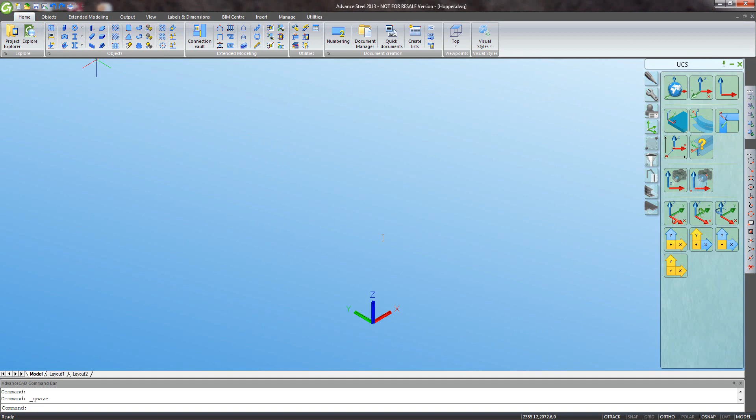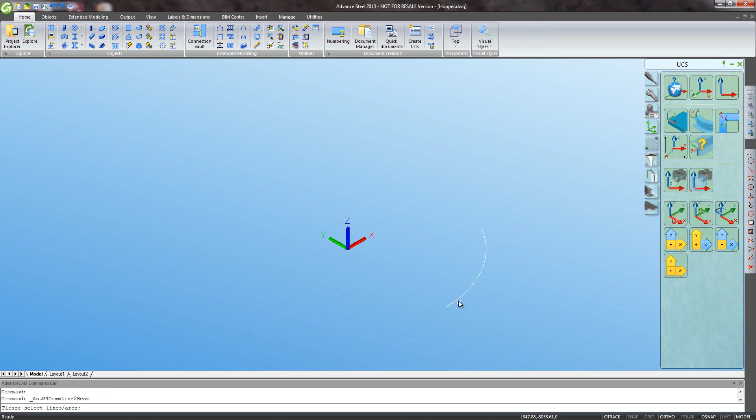So let's start a blank file, and I'm going to start off by doing some simple construction work. So I need an arc to start with. Just put in some simple dimensions, and I can convert that arc into my curved beam. It's going to support the hopper. I'll have a bit of channel, so that seems to have come up with the correct size for me.

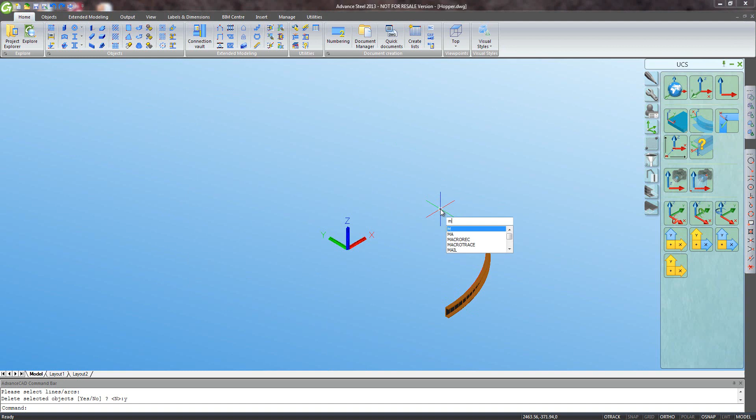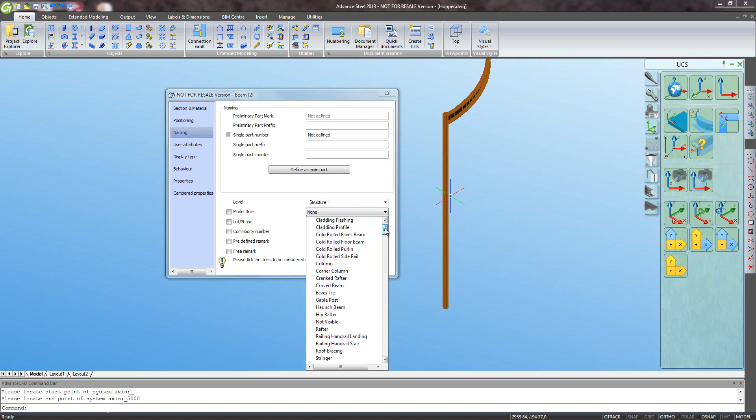Get it in the right position and tell it what part it is. Now I'll move that up to the right height instead of ground level, and I'm going to draw one of my columns on the end of that. Again, it seems to have come up with a suitable size for me. I'll tell it that's a column. And I'll adjust the position of that a little bit.

Now I don't actually want the column right on the join between the portions of circular ring, so I'm going to rotate the ring 10 degrees like that.

Now we need a nice connection between those members. So come to our connection vault, and from the categories we choose the desired joint type and select the members it applies to, and you can see immediately it's put on the plates and bolts and so on, but they're not quite what we want. I could have had it remember a standard configuration, but this isn't a very standard scenario, so I'll set up all the options I need individually here.

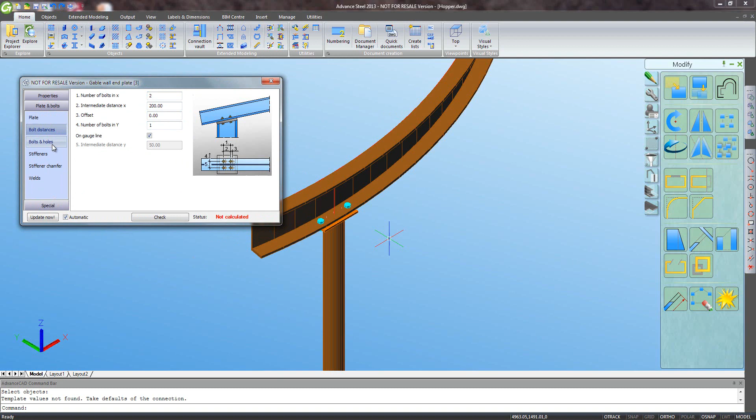Let's adjust those bolt spacings. I think I could do with a stiffener in there as well. A bit thicker than that, that's better. Okay.

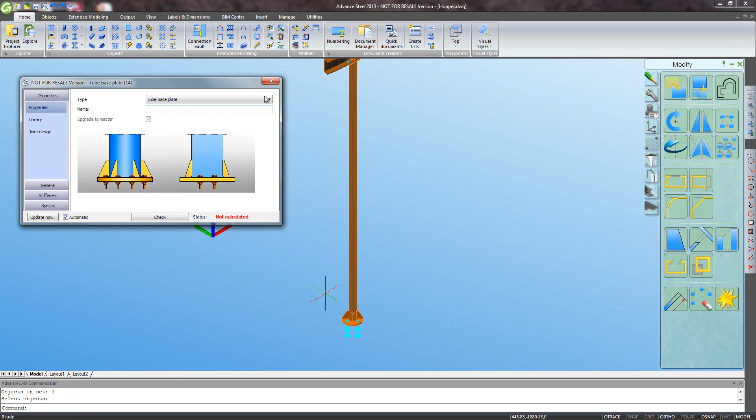I also need a base plate, so I'll go back to the connection vault, select a base plate for a tube, and this time that's put on a standard configuration, which looks perfectly good to me, so I'll stick with that.

So now I'll copy that column, check the options here, rotate it around 30 degrees so that I have 2 legs per ring portion. And as I do that copy, you can see here that the joint at the top and the bottom goes with it.

That's great. Let's have a think about doing a portion of our hopper now then. So I'm going to do some more construction lines. I'm going to go to a separate layer so I can see them clearly. And I'm going to do a couple of arcs again. So that's the arc for the bottom. Now the top arc,

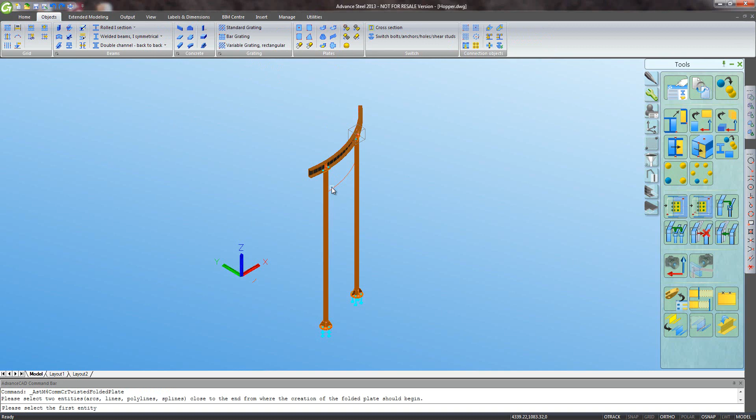I'm going to move that up to make the right height of the hopper. I'll keep them offset to the main structure so I can see them more clearly, but I'll go back to the normal layer and create my plate between the 2 arcs now. So in run command, settings here, there you go, I've got my portion of folded plate out of 3 panels. That's smooth enough for me.

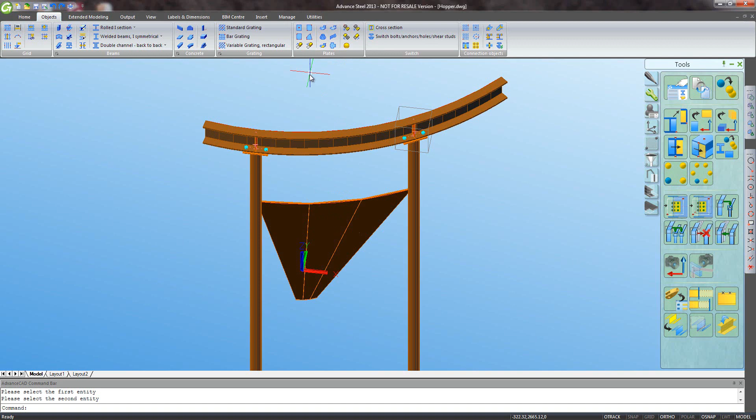And now I want to put a flange on top of that fold. So let's get it up in the right height. And now I'll move my coordinates. Let's move the plate round first so it's in the end of the beam. 10 degrees, that should do it. Yep. Now I'll put my flange on top of that.

I'll get my coordinates in the right place to tell it where I want the flange to go. And put my plate on the middle of that segment and offset it. Yeah, that's nice.

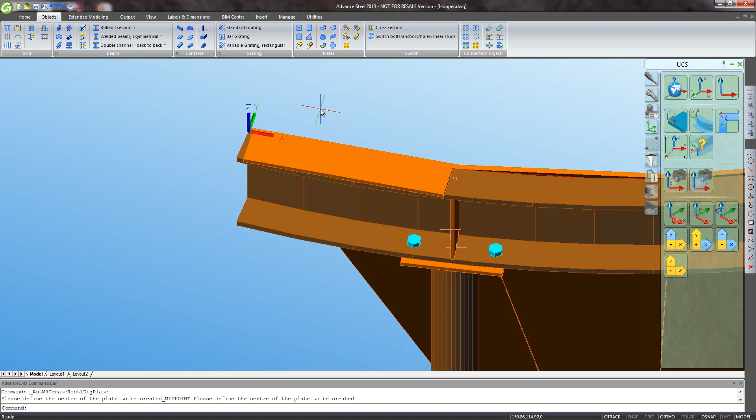Need to bolt those 2 together, so I simply ask for some bolts between this plate and this beam, tell it where to put them, and check the parameters. So it's come up with 3 long, 150 gap. Looks perfectly good to me, so I'll stick with that. That's great.

Okay, now I need to have 3 of those, so I can do a pattern of that plate. And if I, hang on, better put the coordinates back to 0 so I know where the centre of the vessel is. Now I'll do my pattern between those plates. 3 of those at 10-degree intervals.

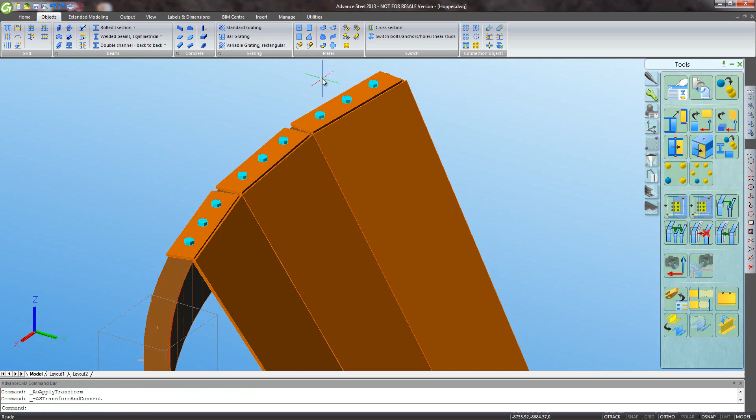There you go. Now those flange plates aren't going to hold the hopper up unless I actually join them to it, so I use a fold, create a fold between this member and this member, and there you go, let's put the fold in the middle. And repeat that for the other 2. Fold there, and a fold for those.

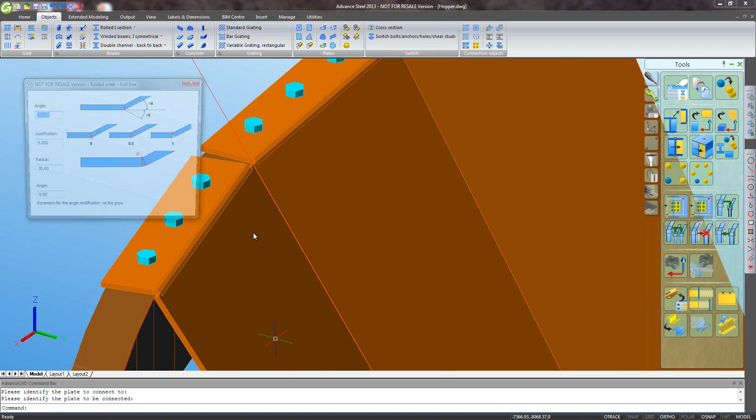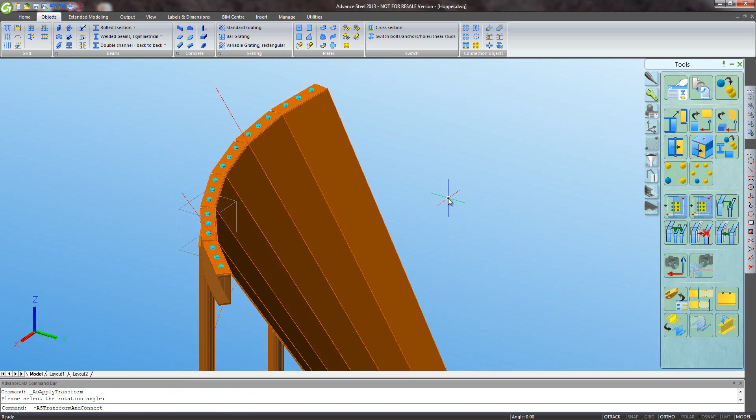Smashing. So now I've got one complete panel of my hopper. Now on this 60-degree bit of ring I've got 2 panels, so better go for another pattern or a rotate copy. And I'll have 2 of those like so. Yep, that's good. So that's 1/6 of my ring. It's looking good.

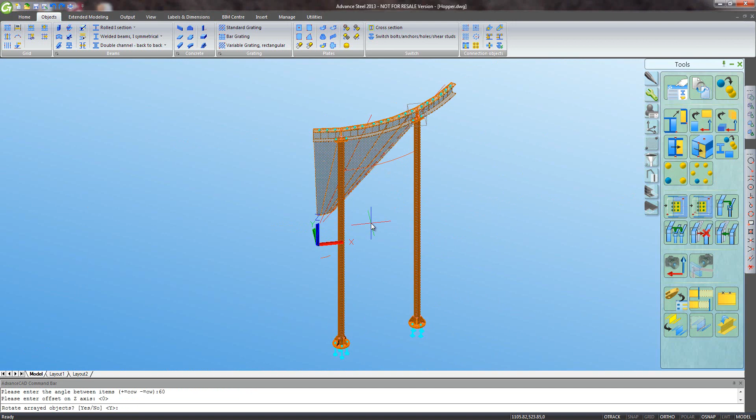Now I can very quickly, with just a rectangular or a polar array, copy these members, and I'll have 6 lots, 60-degree intervals. Bingo, there you go. There's my whole hopper.

So that's really easy, and already we're well along in our structure. Turn off the construction, I don't need that anymore.

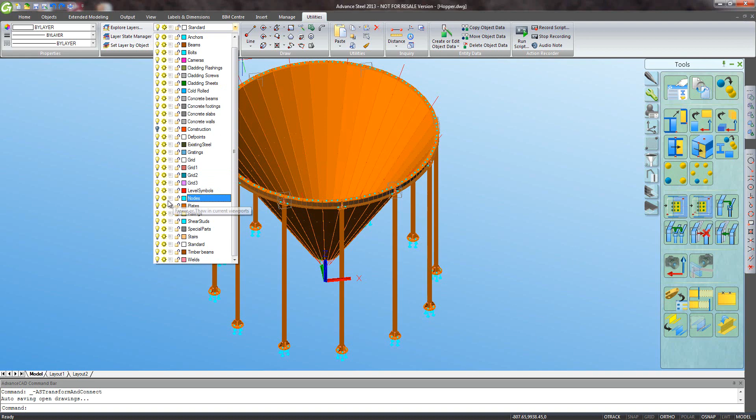So I want to connect these top rings up, so I think I'll hide the hopper for a minute, turn off that layer so I can see what I'm doing a bit clearer. Let's have a go at connection, so I could do with end-to-end connection. That should do it.

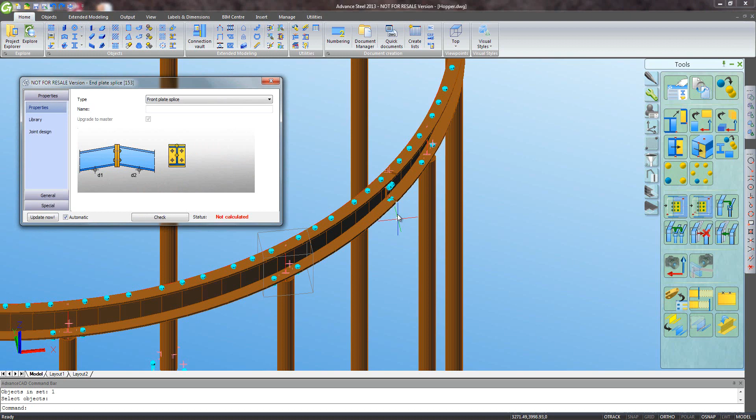Okay, those bolts look like they're in a slightly strange position. Let's check the options. The settings seem sensible.

Let's turn the plates on so I get the full picture again, and make sure I can see what's happening. Okay, the plates look alright. Let's edit that joint again and check the options once more.

So if the plates are alright, it must be something to do with the bolt spacing. Perhaps we just change this offset. Ah, that's better, that's good. Right, so now I've got the joint configured how I want it.

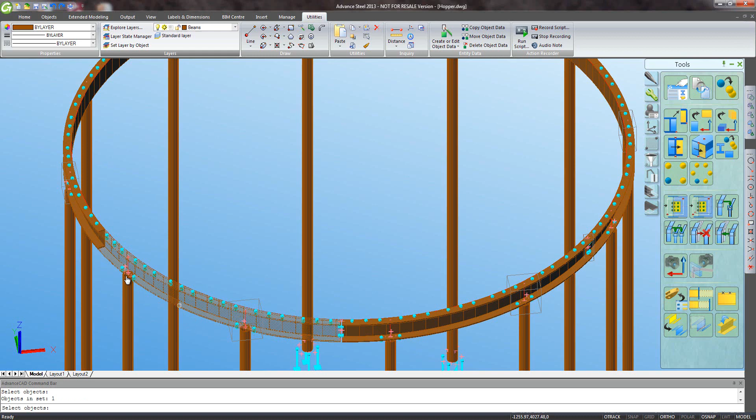Let's hide those plates so that I can see the beams more clearly. And I can copy that joint that I've got there to all the other connections between the ring beams. One there. And it's putting the same joint in, or the same configuration, in each of these 6 locations.

Okay, that's done that. Turn the hopper back on. Fabulous.

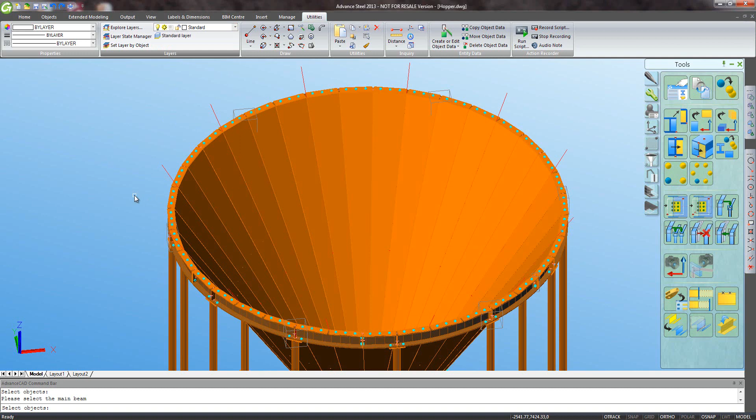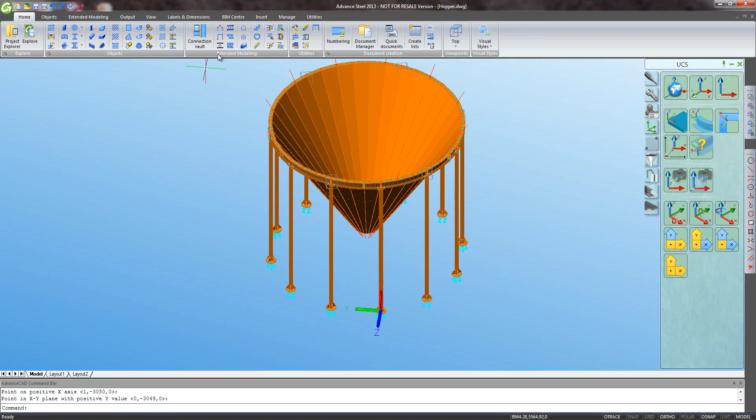So the last thing we've got to do now is put some bracing on. So let's put my coordinates back in the right place between the legs there, so I can put some bracing between the 2 legs. I'll ask for the bracing macro to create some, and I want to go between those 2 legs like that. Before I set any options, I'll use this white box and just adjust the top and bottom offset.

So I need to move the top down a bit, maybe 300mm, and the bottom up a bit so it's clear of the base plates.

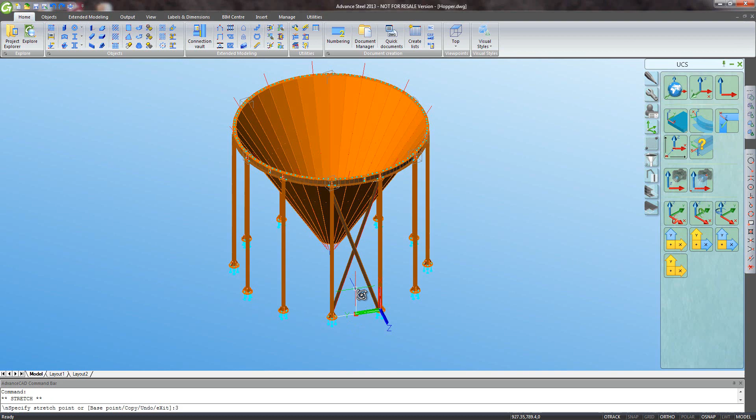Okay, let's have a look. Yep, that's good clearance there. Happy with that. So now I'll go back into the properties of the joint and set up all the beams how I want them.

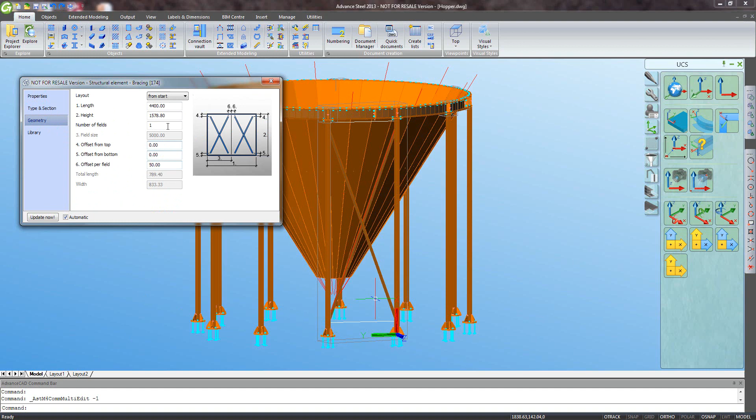First of all, I don't want a great big chunky channel, let's go for a smaller angle. Get them oriented nicely. Oh, don't forget the gap between the beams. And I want 2 X's, that's good. Okay.

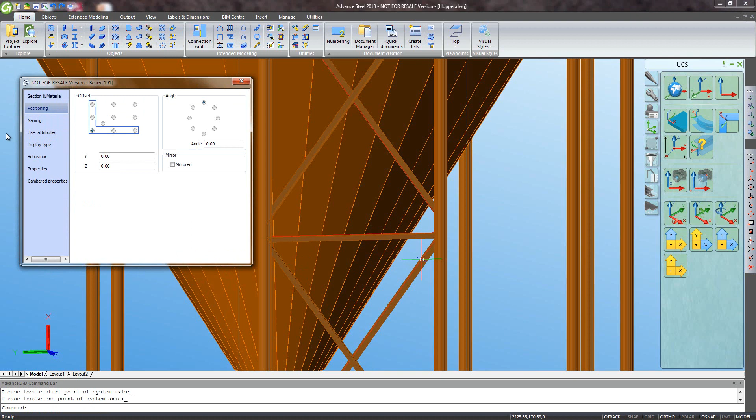I want a horizontal cross member, so I'll draw in a bit of angle directly from the end of that bit of bracing to this one. Choose the right size. It's on the heel. Don't forget to set the name.

Okay, now that's gone between the bits of angle, and remember there's a 50mm offset, so I just need to move the front edge there, and I actually want to move it up equally between the two panels of bracing, so that should be in the middle now.

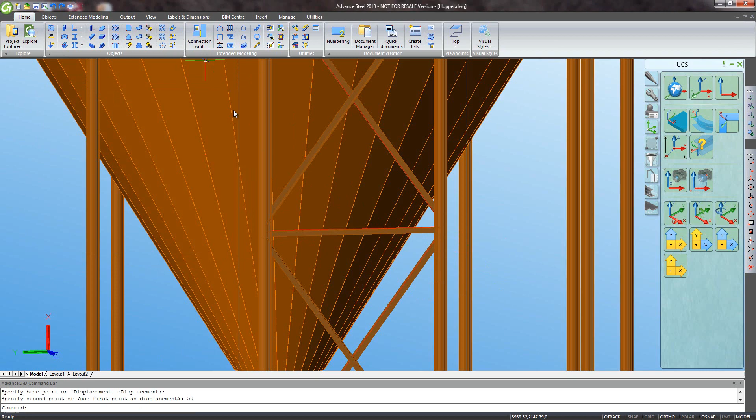And I'll create appropriate joints. So let's have a clear view of one corner. There you go. And I'll come into the connection vault once more under bracings. Let's go for a gusset plate. Simply choose the members. And there you go. It's not quite the shape I want, so let's have a look at the options.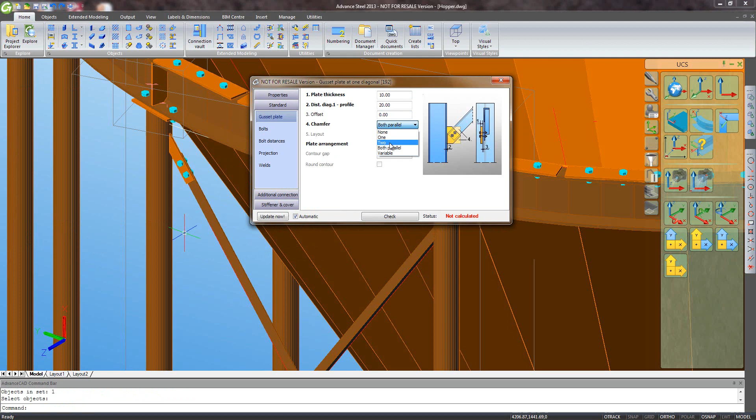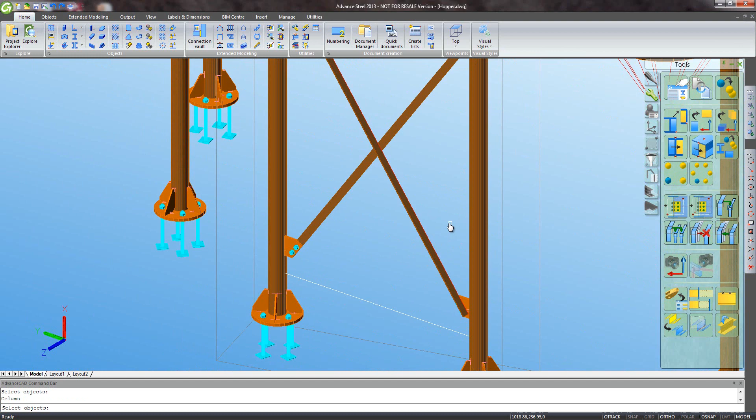That's better, happy with that. So I've got one I like. Now I can just do a copy again. I'll have another one of those joints between that column and that brace. These two, and these two. Great. Now it's the ones in the middle.

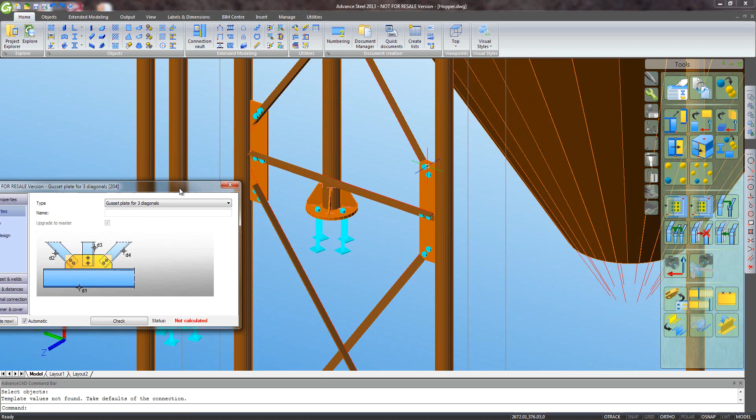So we have options or versions of the joint for 1, 2 or 3 brace members. Let's choose each member. That looks reasonable. Same on the other side. Yep, looks the same. Happy with that.

So once again, I don't need to do it all over again. We can just make sure my coordinates are in the center and make a polar array or pattern, take these beams, and I want 12 copies of them.

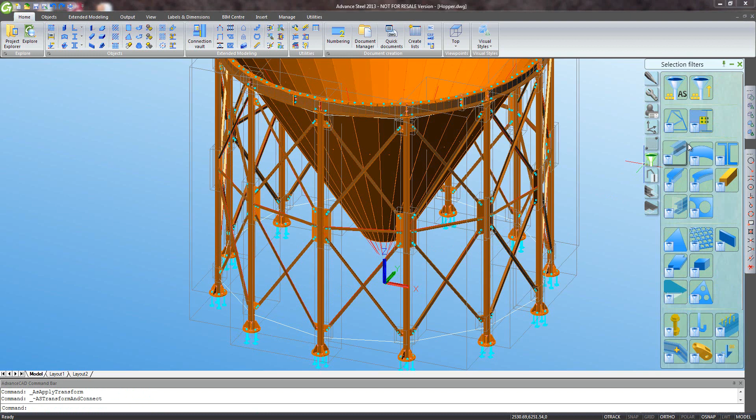There you go, a couple of seconds and that's done, just turn off all those joint boxes. Lovely. That's basically our structure finished now. How easy was that?

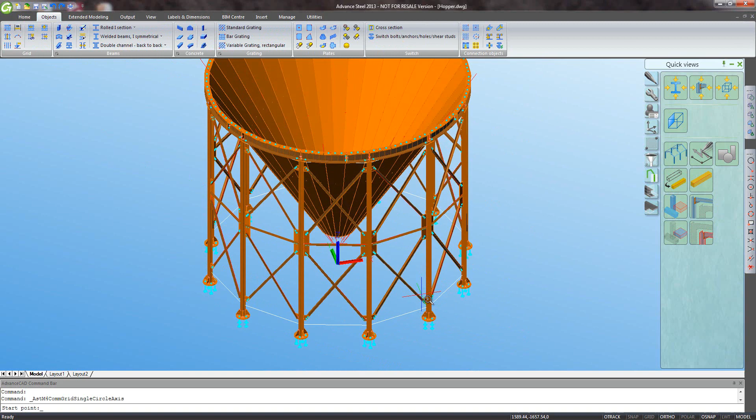I'll tell you what I will do though, just for making the drawings nice, I'm going to put a bit of a grid on here. So I'm going to ask for a curved grid line from the base of this column to the base of this column, and it's got to go through the foot of this column. There you go, yep, that looks good.

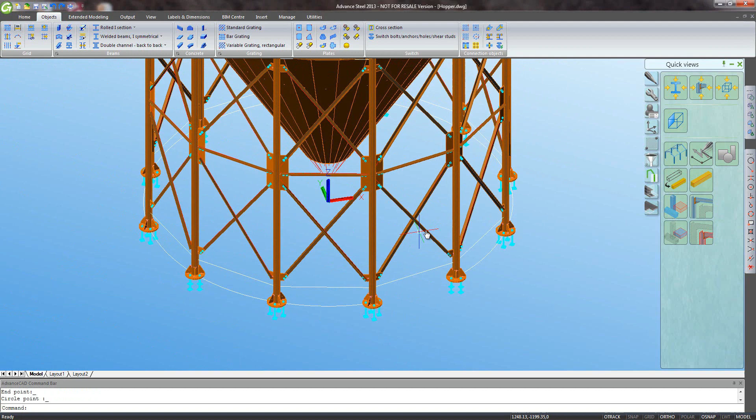And then I'll do a grid line across the diameter, so a single grid line. Just make sure I can see the legs clearly, get the ones that are opposite. So it's the base of that leg, and the base of that leg. And I'll have these numbered in letters instead of numbers, and rather than draw 6, I'll make a pattern of them.

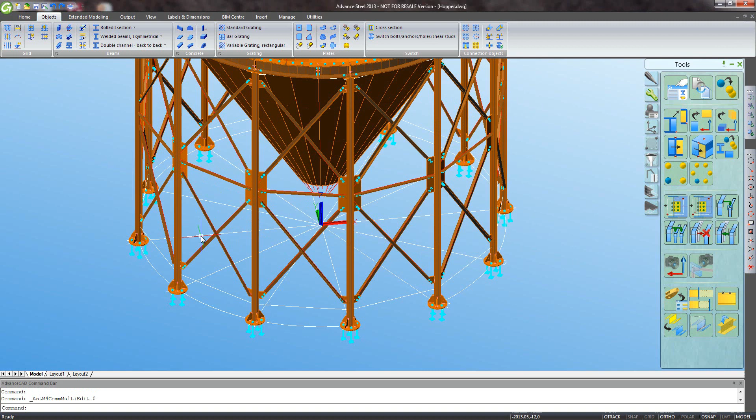Okay, great. Now because they're all individual grid lines, I just need to quickly set the name for each grid line. So that one should be B, C, D, and E. Done. Okay, now we're ready to do some drawings.

So to prepare for our drawings, I want to create some cameras. First thing I'll do is think of what GA views I want, and the first one is a foundation view. That'll show us where all the base plates go, and I'll set up some parameters for that.

Choose the right style of drawing, it's a stanchion layout. I'll have another camera - I just want to do the base of one foot, so this will be an enlarged one, just of the base plate. Don't need to show the whole structure, just want to limit that to a certain area. I think 400, yep, that looks like it's going to cover the base plate, and that's a detail of a base plate.

While I'm here, I can set one up for an overall plan view. That can be the entire structure. I'll just have a nice simple overall view. I think I'll do an elevation of the whole thing - front view.

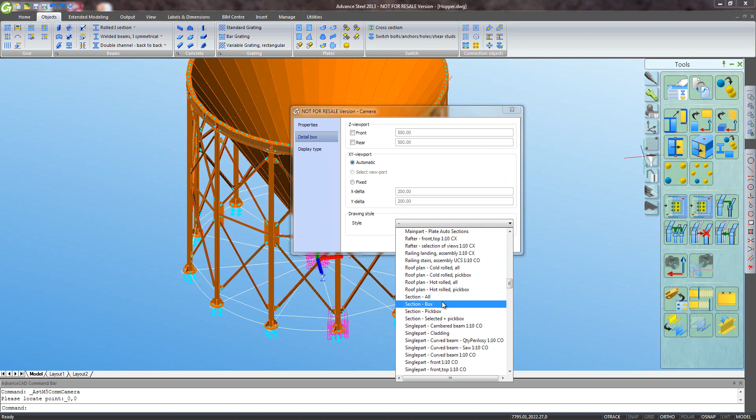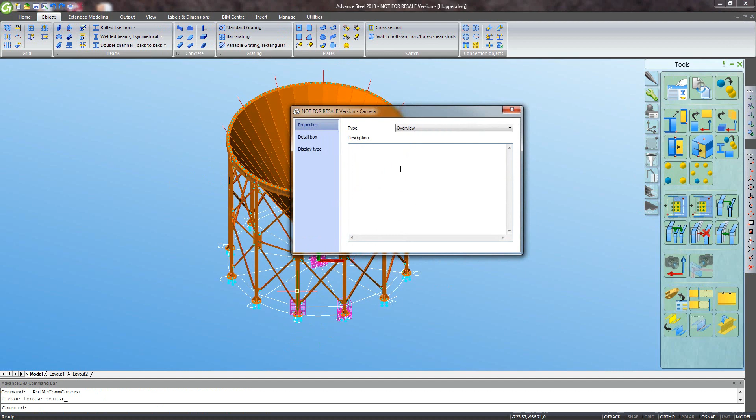Now I also want to do a 3D view, so let's orientate myself for a nice 3D view, and then I'll ask the coordinates to match the screen and say I want a view to match this. Just call it ISO, that'll do, so I'll recognise which one's which.

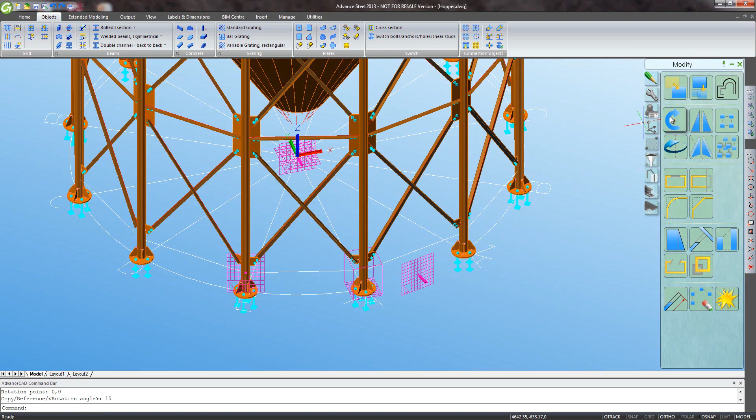Okay, now this front view, actually would rather have it looking flat onto the bracing rather than one leg, so I'm just going to rotate that. 15 degrees should do it between the legs. There you go, that'll be flat onto the bracing, so one piece of bracing will be presented square on in the view.

So having set that lot up, I now need to number the components in the structure. The system here automatically calculates which components match and how many of each part there are. And now I'll come in here and click on this button to say, give me all the drawings I've set up.

So now while it does that, you can see on the command line flashing by there, it's creating all the GA drawings that I've asked for. There's the cameras I've set up, 5 or 6 different views. It's going to create all the necessary assembly drawings and all the necessary individual part drawings for me. You can see it's creating the view in memory, then testing the scale and the paper size, trying a range of different scales on each paper size till it finds what it considers the best match.

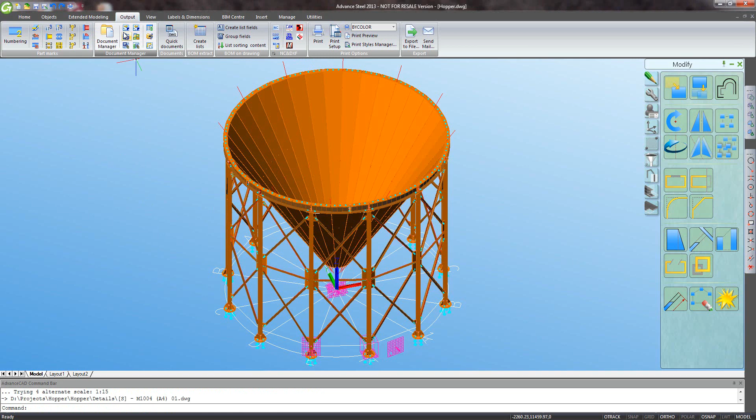Each drawing will be fully dimensioned, ready for manufacture. Okay, let's finish those. So let's take a quick look at what we've got.

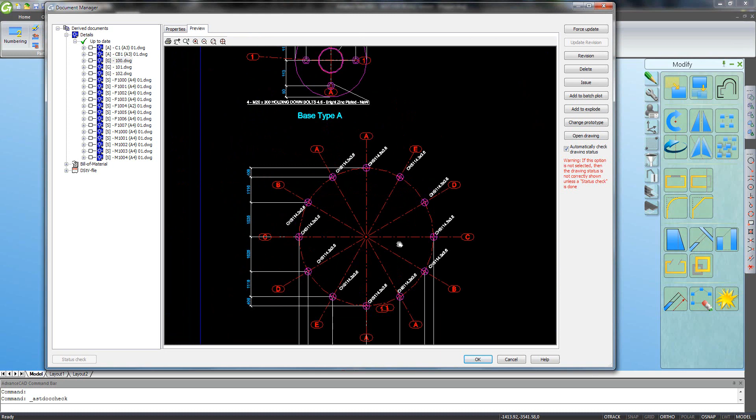Let's have a look at the GAs first. There's a preview of our foundation drawing. You can see there I've got all the foundation plates shown, the base plates and the nice grid lines and some basic dimensions, and there's the enlarged detail of one typical base plate. Next drawing, there's our plan view and our front view.

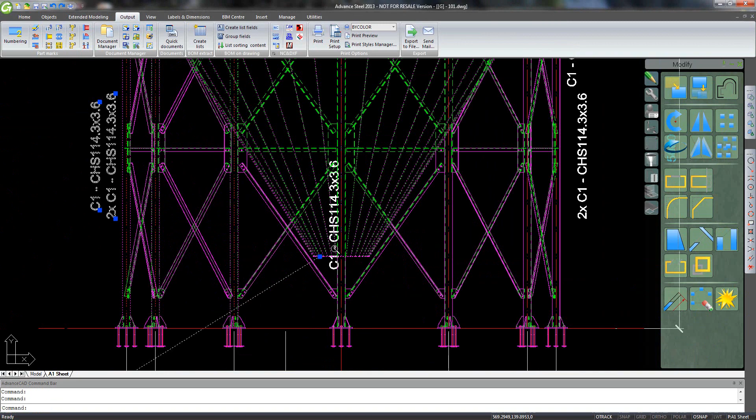Section view looks a bit messy though, so maybe I'll just go into the drawing and have a closer look at that. Don't really want all these labels, let's delete these, just simply select them and delete them, and maybe I'll turn off the hidden detail as well because I think it'll be cleaner without that. Now depending on which style you choose, it wouldn't have created hidden detail or wouldn't have created labels in the first place, but there's many different styles and you can manipulate each one to suit whatever you want, as simple as that. So I'll just close that.

Let's have a look at the rest of our drawings. So there's one more GA to look at. Yep, that's our nice isometric view. That's great, we didn't really want that on a separate drawing though.

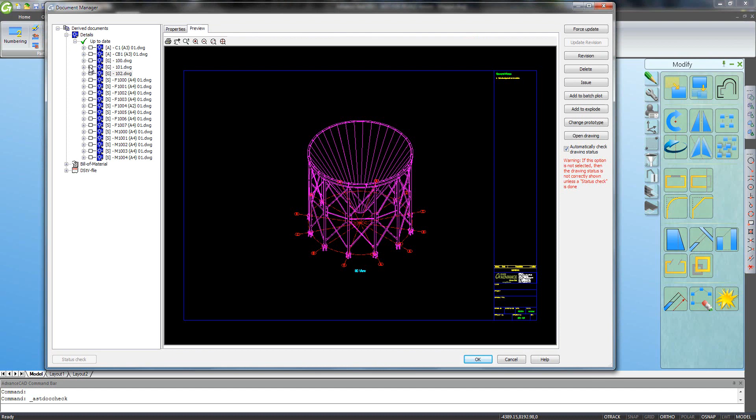I think there's, yep, plenty of space left on the foundation drawing, so how about we move that isometric view to the foundation drawing there. Just drag it up and the drawing 102 is deleted and that isometric view is now perfectly placed on the blank space on the foundation drawing.

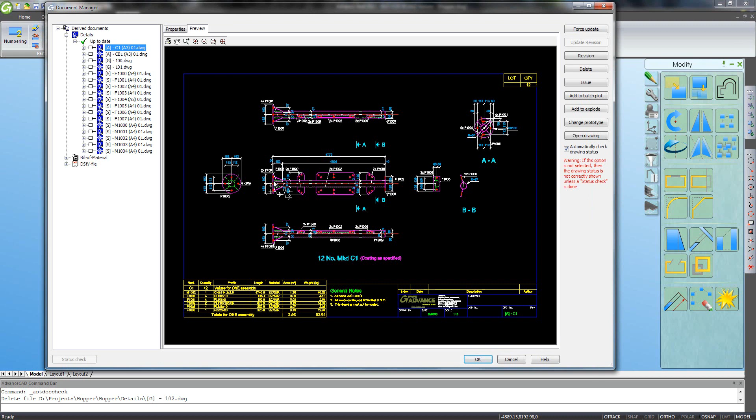Lovely. So going on to the assemblies, this is our column assembly and that looks okay. And there's a curved beam for the beam ring. Let's just touch that one up a bit.

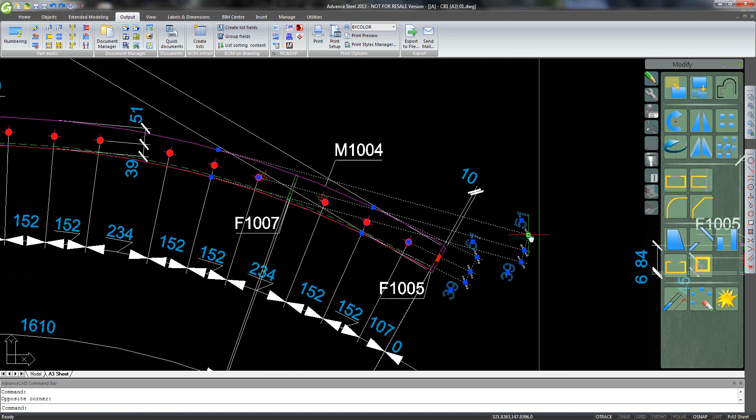Some of these dimensions are a bit untidy, so it's not a problem, they're all the ones you need on there. In fact, I'll probably live without that one altogether. And you can just grab the others and move them around in or out using the grips and place them where you think is tidier. As you'll see, most drawings they get pretty good straight away, but some of the curved ones you just want to touch up or shuffle a couple of dimensions around.

It's very quick and easy to do. Let's put that there, and what I've got going on this end. Move that in, over to about there. That's the end plate, don't want that one.

Leave that altogether, and that one's the stiffener. This one can move in. And that one better move up a little bit as well, I think. There you go. Great, that should do it.

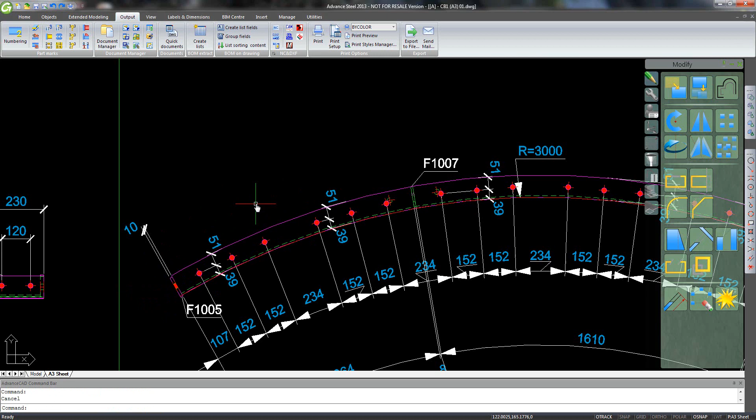So that's much tidier, and it took a few moments to get all the rest of the dimensions needed there. Let's look at the rest of the drawings.

These are mostly the plates. There's the gusset plates, the bracketry and stiffeners. Oh, this is an interesting one.

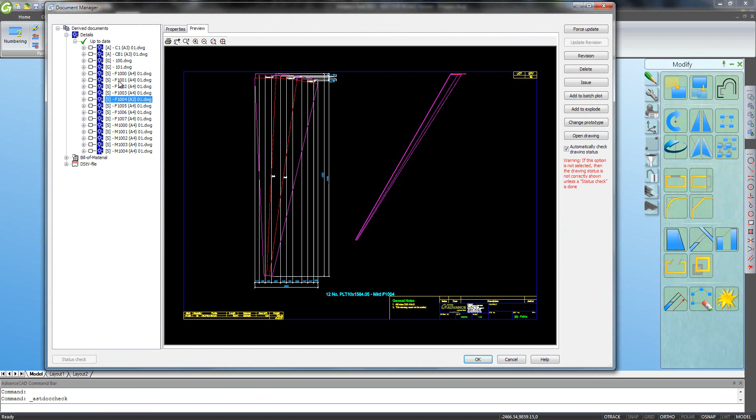Let's open that up. So this is our folded hopper section. Now these holes at the top, because they're on a curve, you wouldn't really dimension them like they've done here. So let's just delete these chains of dimensions, and we can put our own chains in instead. It's very easy to add your own dimensions.

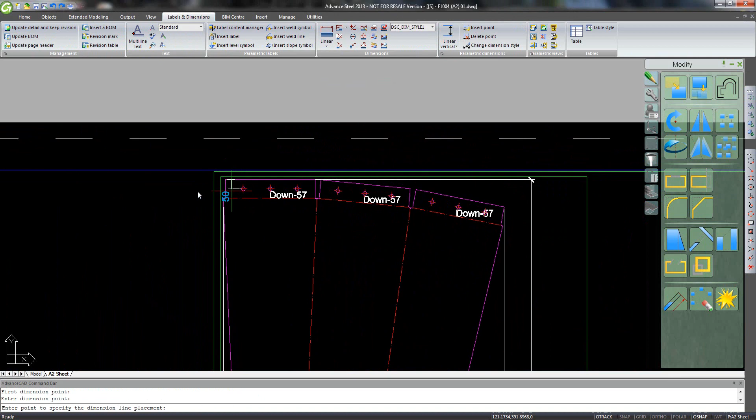You just do it much like any other CAD system, and it gives you the true measurement from the model, regardless of scale. You get the real size, with all scaling taken into account.

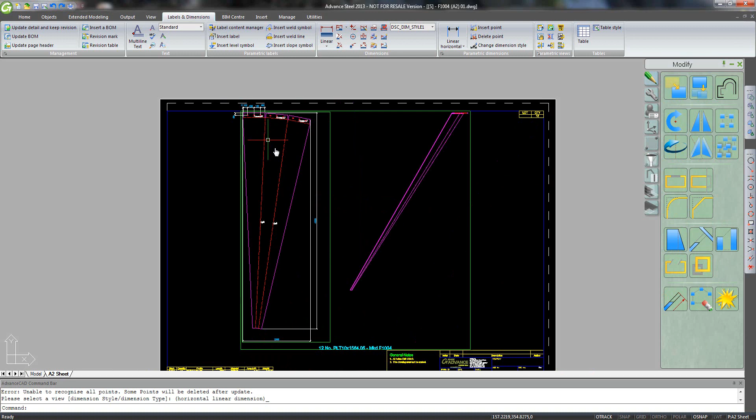Let's create a chain across here. That's fine. Okay, so that's gone a little bit outside the border, so it's not a big deal. Just grab that frame and move that view down just a little bit. That's nice, that's fine. Okay, so that's tidied up that drawing, and you can see it's got the full development of the hopper plate there.

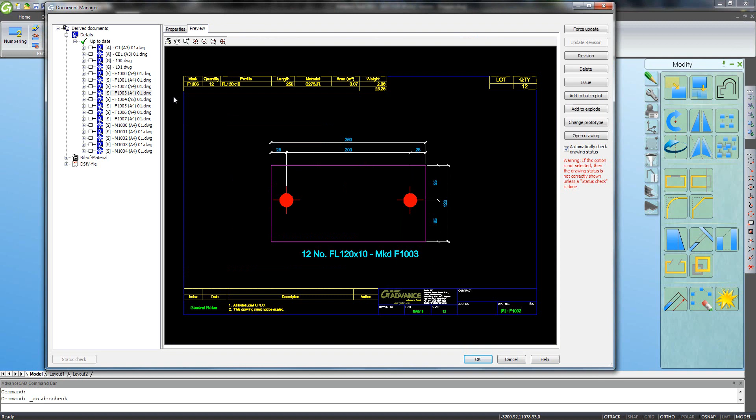Any more drawings to look at? Which one were we on? Oh, that's the one we just did. Okay, these all look fine.

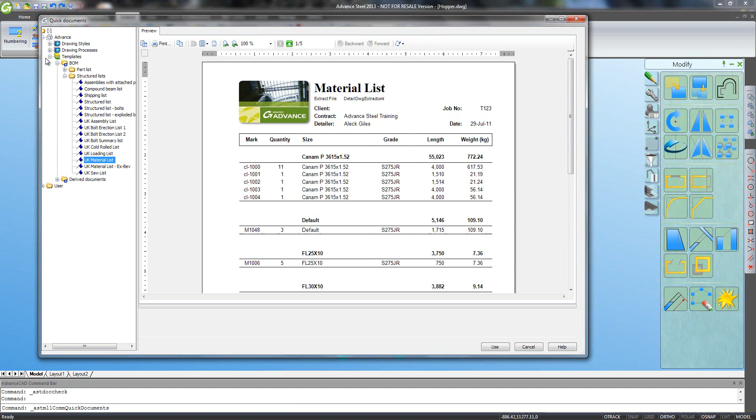Okay, time to do some lists now to go with that, some bills of materials. Let's do a straightforward material list. Okay, there's our list. Just a few clicks and it creates a very professional looking list, nicely formatted with all the information.

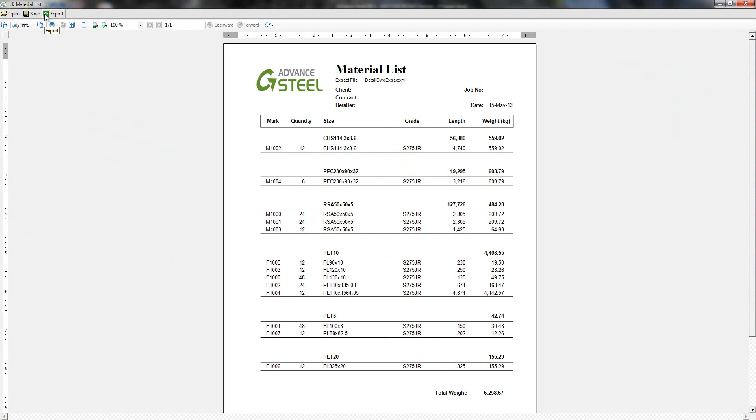You can also export that to common formats like PDF or rich text, or if you want to go just plain unformatted text such as is used by many other systems, you can just export it. But you don't have to have this information, the beam sizes and so on.

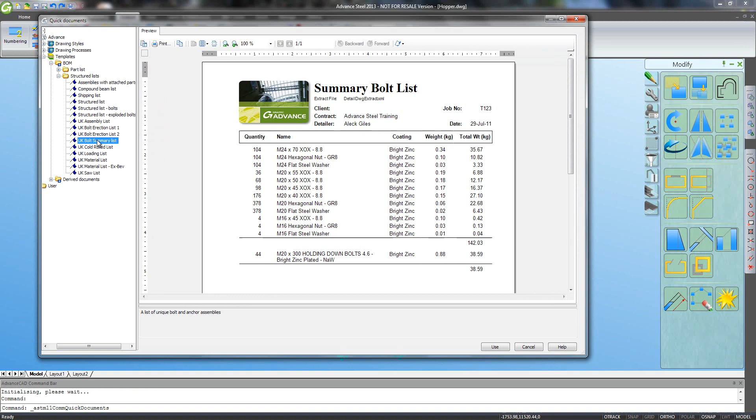You can go for lots of different types of list. If you have a look through, you can see we've got all sorts. We've got bolt summary lists that list quantities if you want to buy by the bucket load, or perhaps we'll generate this one.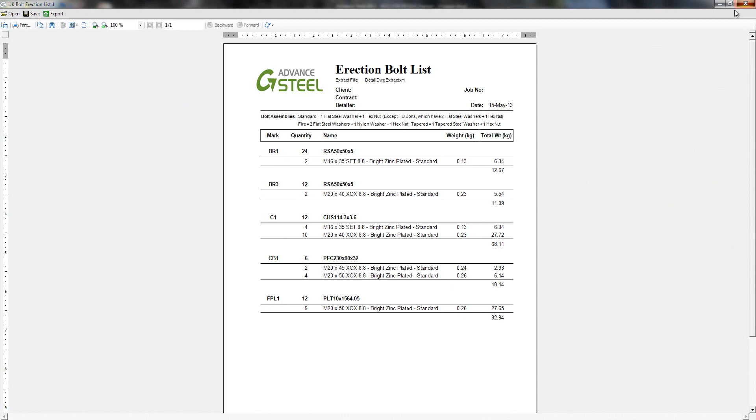Okay, you can also create all the NC files for automated machining and DXF files to go into the plate profilers. Blink and you miss it, they're so quick. Let's have another look at those in the document manager. Everything's controlled by the document manager.

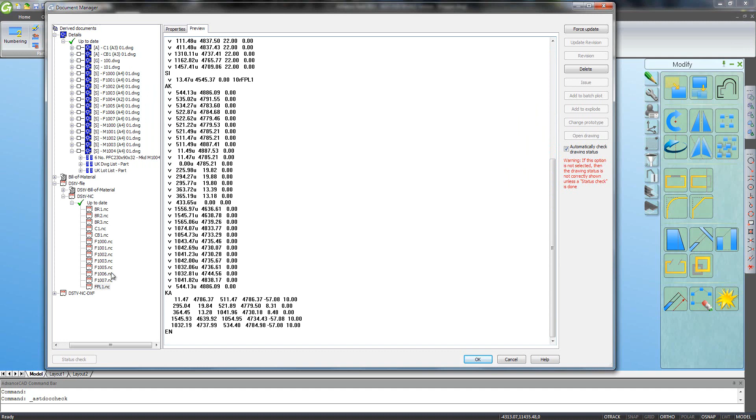So here we go, there's our NC files. You can see the coding there, all to the DSTV standard. Different types of beam, all the bolt positions, the contours, even the folded plate has the contour defined accurately in there. And then these are the DXF files you can feed straight to plate profilers.

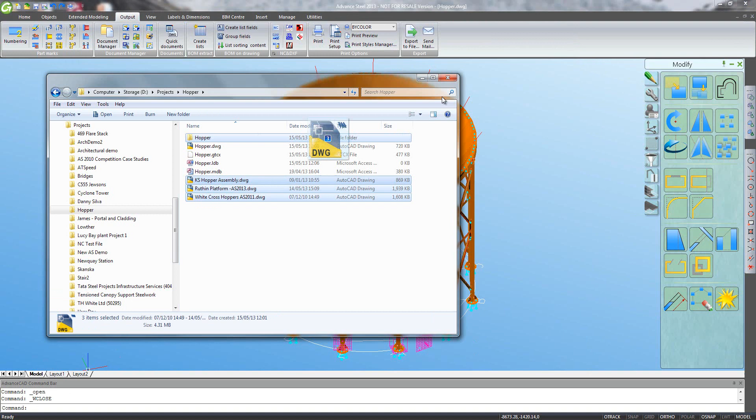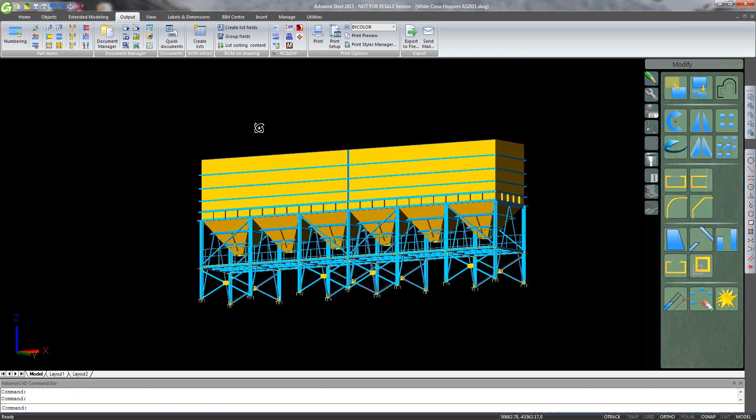Okay, let's have a look at some examples we've got from customers in the UK. Just load a couple up. Okay, now here's a sample with some square hoppers, but there are quite a few, quite large on this structure here. So you can see he's got the full supporting structure, made the hoppers out of panels of plate.

It's got the access platform underneath with the railings and everything included. This was actually this user's first project in Advance Steel.

Here's another nice project, an industrial platform. Some good hoppers there, various shapes and sizes.

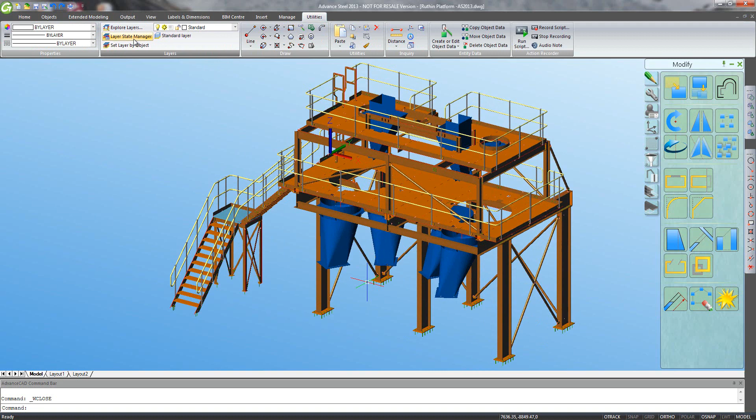In fact, what I can do is come here. Yep, going on that layer state, I can show you just the hoppers on their own. So you can see there that we've got square hoppers made out of flat panels, we've got full cones, and we've got the circle to square shapes as well with the offsets. Lots of variety there, showing the extent of the plate work for that structure.

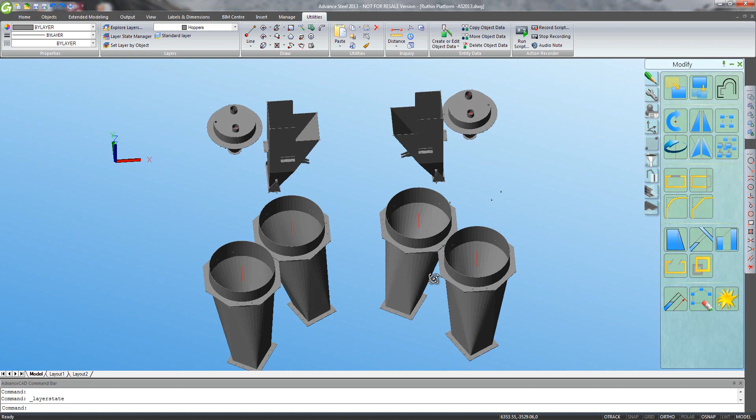A good range of tools used there.

And then another one, this is a little bit different, it's more of a filter box or hopper. It's got various inserts and structural members around the outside to hold it together. Mostly flat panels though this time.

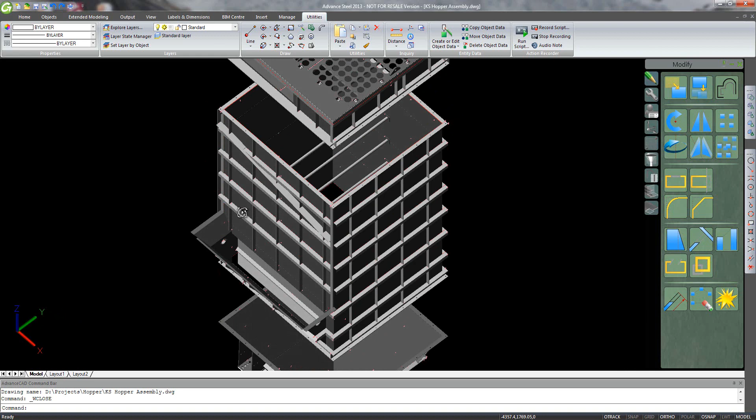So Advance Steel is ideal for creating any kind of plate work you need, folded plates, hoppers and so on, and very easy to create the necessary supporting structure.